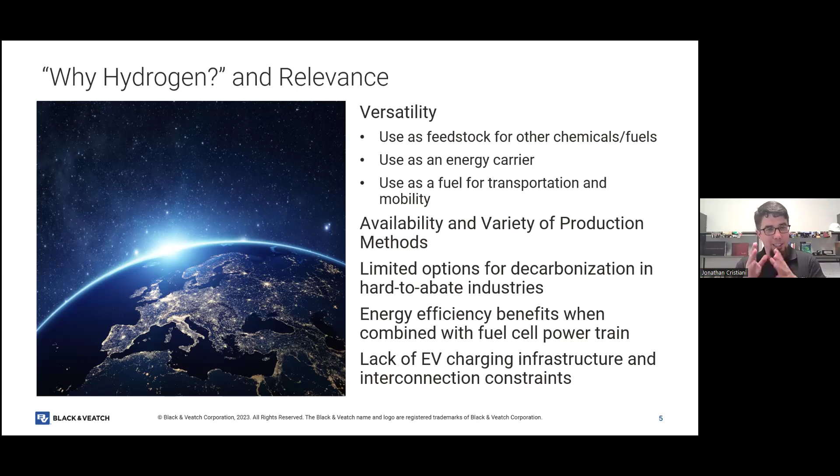So in some cases, we're very limited in terms of what options we have for decarbonization, especially some of those hard to abate sectors like aviation, transportation, some of the steel and cement type industries. So I want the team to start thinking of hydrogen in a similar vein as batteries, in that it's an energy carrier. It can be used for all these different purposes, and it's actually quite complementary.

So you can see on this slide some of the different ways that we think about battery electric vehicles and how fuel cell electric vehicles with clean hydrogen complement that, especially when we start thinking about medium and heavy duty vehicles. Buses is something that Des mentioned. We're using hydrogen in all these applications today, and we're in late stage prototyping, pilot fleet type stuff for medium and heavy duty applications. So there's really a lot of excitement around fuel cell vehicles, but chicken and egg. We need to have infrastructure to support those endeavors.

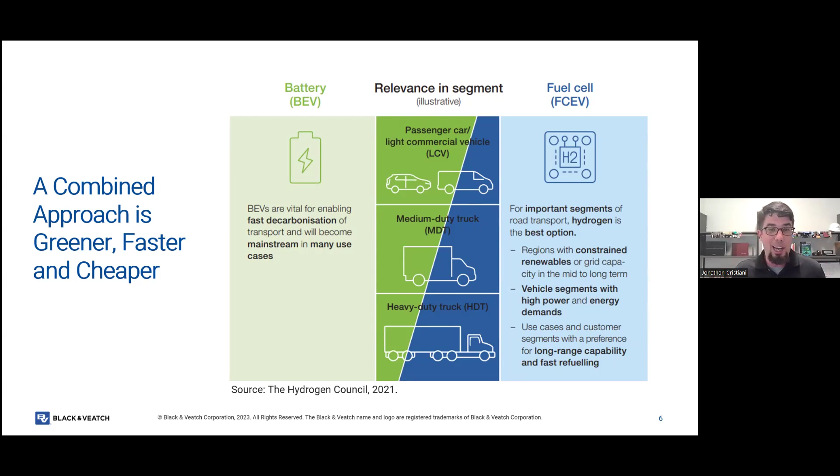As we think about transitioning our mobility sector to be zero emission, one pathway is not enough. You can't put all your eggs in one basket. It's nice to have diversified options here. And that could mean taking the carbon out of gasoline and diesel. That could mean other gaseous fuels, like Ben mentioned, CNG and propane and the like. And that certainly means also hydrogen and batteries as well.

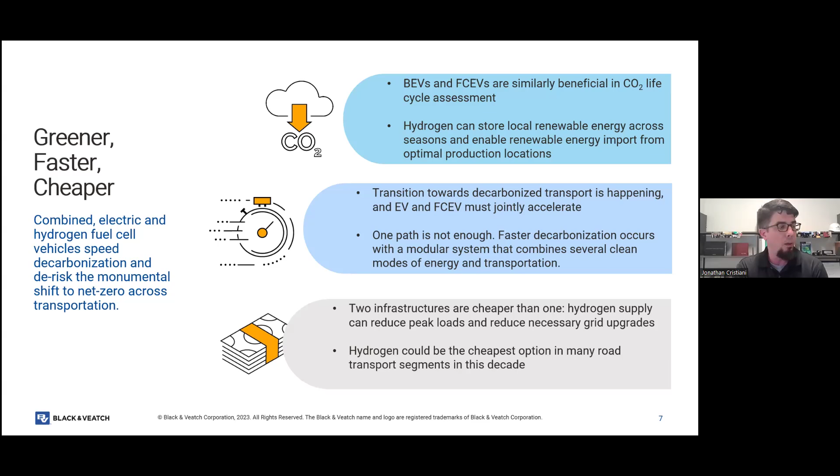The two infrastructures are different. Ostensibly, you're charging with one and you're refueling with another, but they can be complementary, especially in the sense that with some of these high power DC fast chargers, you may not have the bandwidth to interconnect to get things done quickly. And so hydrogen can actually be a nice complement to that. And it could also be the cheapest option in certain cases, in certain geographies with certain duty cycles. And some of that is being proven out now, especially for those heavy duty applications that I mentioned.

So stepping back, Hydrogen 101, it's all what you learned in chemistry class, however many years ago. Hydrogen is very abundant; it's the most abundant element in the universe. It exists as a diatomic gas, so two atoms together. And it's colorless, odorless, pretty simple and easy. It's very light, so that makes it quite buoyant. But because it's light, it can get blown around by the wind.

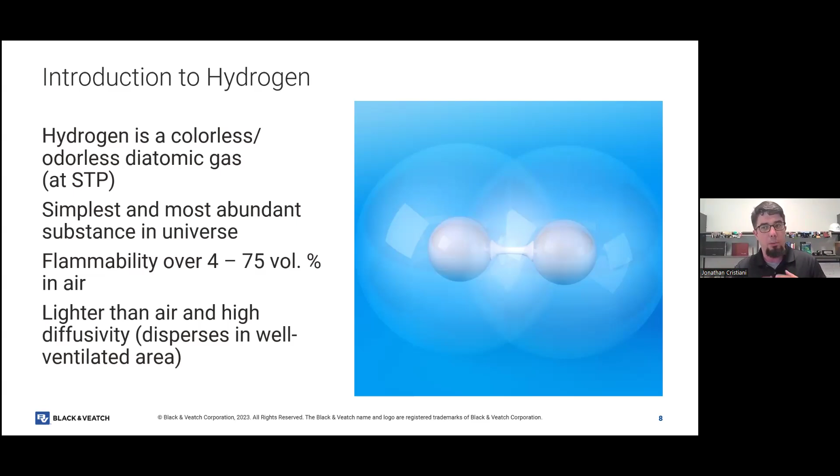So if we're venting hydrogen, for example, and there's a lot of wind outside, you're going to see that hydrogen kind of blowing all over the place. It's got a really wide flammability range, the widest of any substance in the universe. So that's where we start to get into safety related issues. And it's also very diffuse, so once it's released to the atmosphere, it's going to form a non-flammable mixture quicker than most other gases.

When we think about hydrogen as an energy resource, as an energy carrier, you often want to compare it to other fuels we're more familiar with. So a kilogram of hydrogen is roughly equivalent to a gallon of gasoline on an energy basis. And it also contains the same amount of energy as 117 cubic feet of natural gas, but at standard temperature and pressure, that kilogram of hydrogen occupies 421 cubic feet.

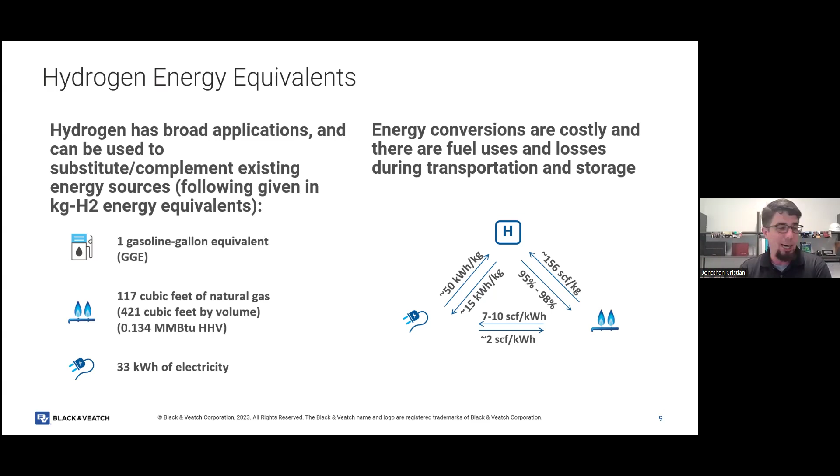So on a gravimetric energy density basis, it's very dense. On a volumetric basis, quite the opposite. So it's less energy dense than natural gas, what we're used to. And I've included some quick back of the envelope conversions for you in case you're interested.

We can distribute it in our gas distribution network. We can use it for power generation, and there's strong interest in that in Florida, as well as elsewhere. And then mobility, everything from forklift trucks used in Amazon distribution warehouses, which is a pretty big use for hydrogen today, through buses and vehicles, LDVs and MDVs, up to trucks and aviation. So we'll touch on all this stuff today.

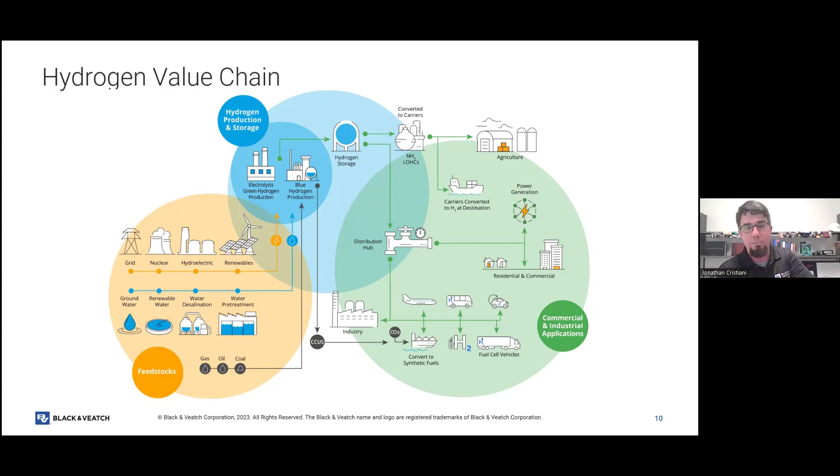As you get to know me, what you'll find is I'm not a fan of the colors of hydrogen, although they're effective as a media tool to simplify the different pathways. And the reason is because I would rather have a discussion around carbon intensity. Carbon intensity is why we're in the clean fuels business, right, team? So at the end of the day, the colors of hydrogen may represent one thing or another, but what we're talking about is carbon intensity.

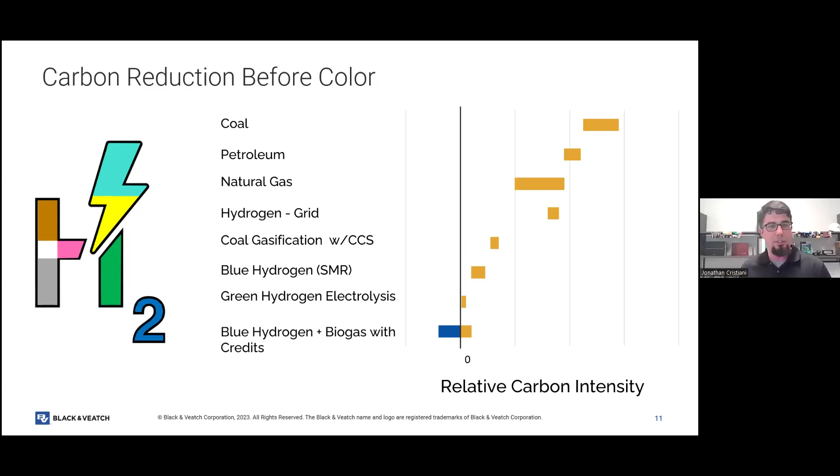And so there's not a color for every last pathway. You can see here some of the different pathways that we think about. These are all just relative figures; there's no hard numbers behind it. The most important thing is there's no industry-wide agreement on what the colors actually mean. We do our best to keep up with how they're being used, but sometimes they have different definitions depending on where you are in the world.

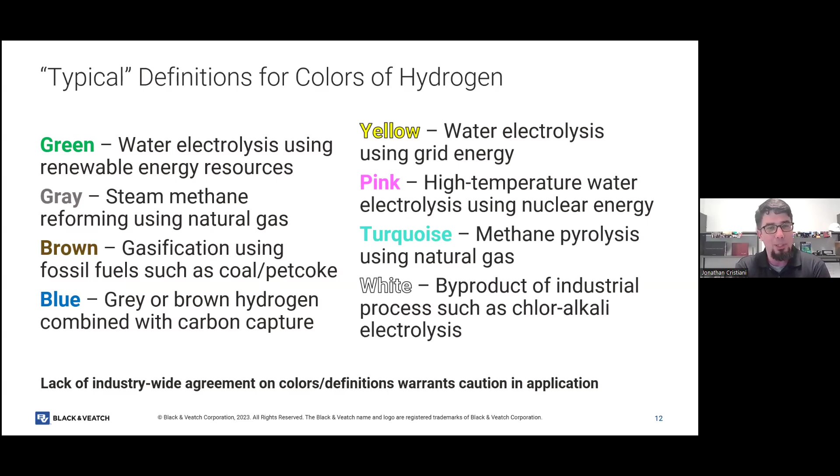Most of the low carbon hydrogen infrastructure that we're talking about nowadays is related to green hydrogen, using renewable energy and electrolysis, like I alluded to before. And blue hydrogen is of significant interest. That way we can continue to use the fossil-based resources that we have and, in combination with carbon capture, reduce the carbon intensity. So lots of different options, lots of different conventions. I won't bore you by going through all of these, but these are about as many as I've been able to gather on a self-consistent basis over the years.

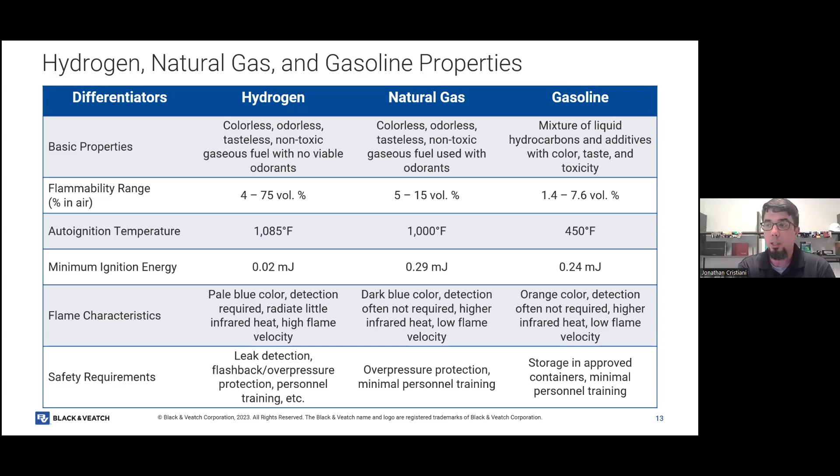Other risks and hazards associated with hydrogen. The big one is leakage, right? Because it's such a tiny little molecule, it just wants to escape and go all over the place by itself. So we need to have a means of leak detection, gas detection, a means of understanding if there's a hydrogen fire. Hydrogen burns nearly invisible to the naked eye. So you need specialized flame detectors, unless you just see something melting in front of you, and that's usually a good sign you have a hydrogen fire as well.

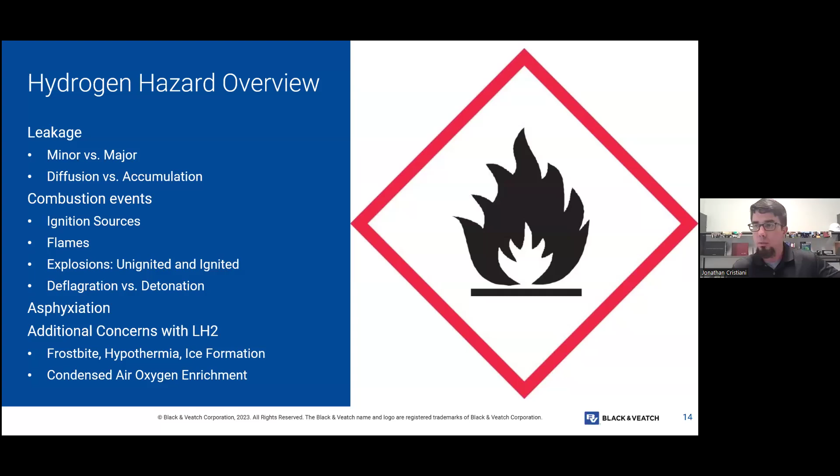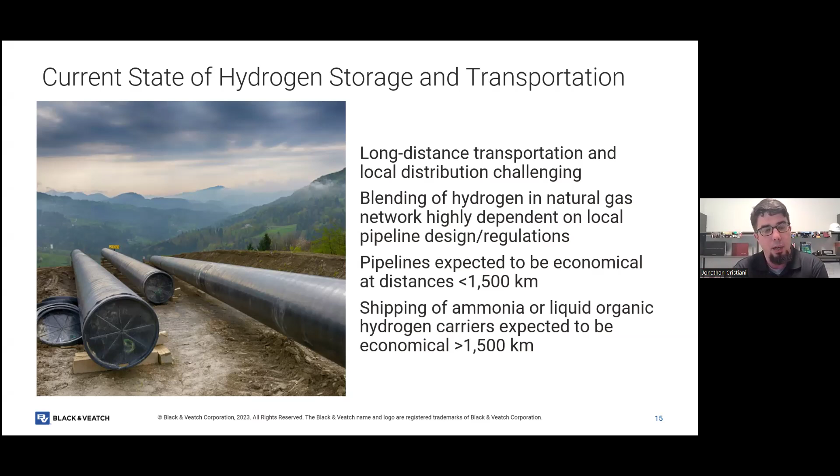So for domestic applications, less than 1,000 miles, 1,500 kilometers, that's where pipelines are really expected to be most economical. When we start thinking about the global trade of hydrogen and its derivatives, it's really more of a focus on chemical energy storage. So ammonia is a big topic that we'll talk about a little more here in a minute. Liquid organic hydrogen carriers basically can store and discharge hydrogen. You've got methanol in the mix, so there's a lot of different options for producing hydrogen domestically and shipping it to markets overseas, and Florida is likely to be a major player in that industry.

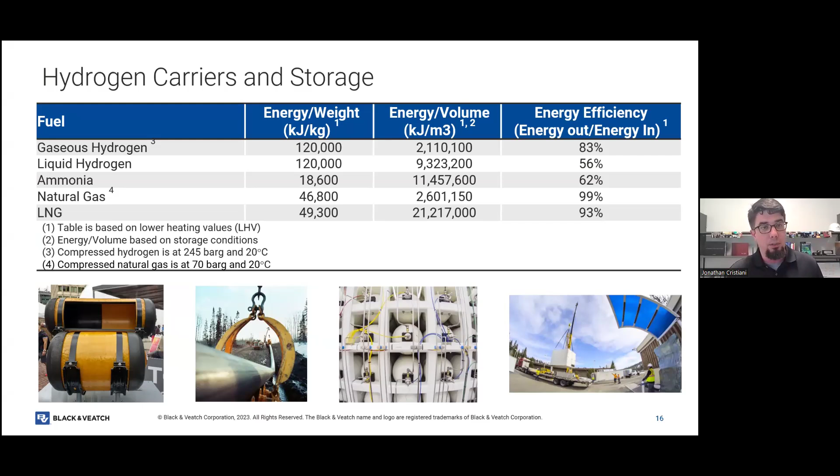Liquid hydrogen is more going to be distributed in a region predominantly for mobility applications. So we don't count mobility as energy necessarily, even though it technically is. And it's a great way to get by distributing a larger quantity without the pipeline infrastructure yet. And you can see ammonia has some favorable characteristics as well. And that's really why it's being considered as kind of the zero carbon derivative of choice for global trade, like I talked about before.

All right, pop quiz number 2. So which of the properties of hydrogen represent the most significant safety hazards? My slide from a couple slides ago. Who wants to take a guess? Please type it up in the chat. I'll give you guys a few seconds. Anybody? No takers? Lack of color, small molecule, flammability. Yeah, Virginia, you've got it.

The wide flammability range is definitely one of the biggest safety hazards, and that low minimum ignition energy too. We really need to be cognizant of the electrical equipment that we're designing. And so electrolysis, it's very energy intensive. We're pumping lots of electricity into these things. So there's a careful balancing act that we need to do as we're pumping in that electricity and trying to get the hydrogen out so that it remains safe. But nice job, team. Glad y'all were participating there in the pop quizzes.

Just a few closing slides. I wanted to at least demonstrate here why ammonia is so important to the industry right now. Not only is it more appropriate and more energy efficient for kind of global applications, but we're now starting to see some convergence. Most ammonia today is used in the fertilizer and chemical industry. But as we start to think about ammonia as a hydrogen carrier, we now can start thinking about ammonia as an energy carrier in and of itself. So utilizing ammonia directly, maybe combusting it in a power plant, maybe cracking it back to hydrogen so that can be distributed through domestic pipeline systems or what have you.

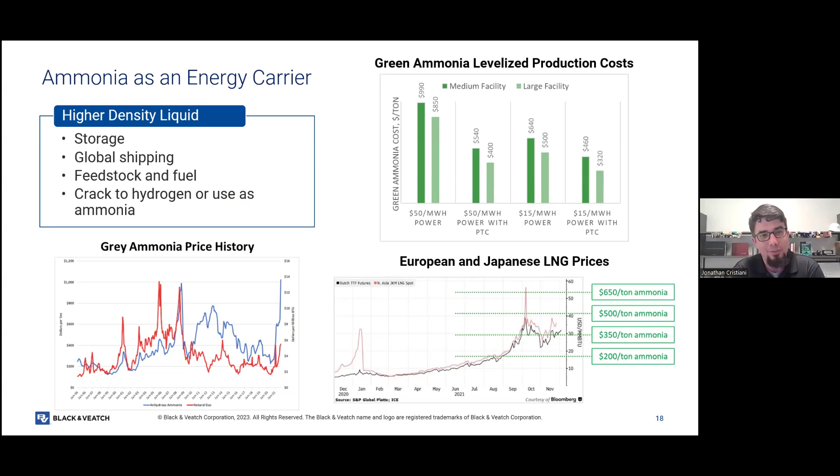Another big one that's of interest, particularly for the aviation industry, is sustainable aviation fuels. I know there's also interest in using hydrogen directly for electric plane type applications, but that's probably not going to be as major of a factor, at least in the near term. Lots of R&D left to get through that. But if we can use clean hydrogen to produce sustainable aviation fuels, it's the same infrastructure that it is today. We're just taking the carbon out.

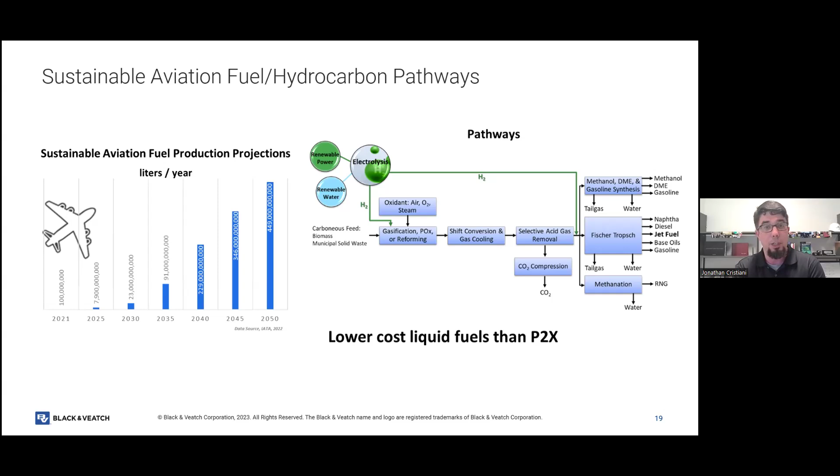So over the next several decades, there are some pretty big targets that you can kind of see on the left-hand side for producing sustainable aviation fuel. Whole bunch of different pathways that we could go using biomass, municipal solid waste, other types of sustainable feedstocks in combination with the hydrogen. And then all the different ways, we can do liquid fuels, we can do gaseous fuels, we can do renewable natural gas through methanation. Lots of different pathways that are possible here as we think about the different means that we want to use our hydrogen.

So some key takeaways: the versatility, don't forget about that. That's why people care. That's why we're investing all this $8 billion in federal money into hydrogen hubs and the infrastructure associated with it. It can be used as a gas, as a liquid. It can be used as a derivative. And there's strong interest in developing pipeline networks, both for storage as well as transportation from A to B.

Liquid hydrogen is probably a little more favorable for the mobility sector itself, just because we've got a long way to go to build out our pipeline networks. And when you think about different project opportunities, you want to be thinking in terms of, okay, what's the carbon intensity? What's my production method?

What's my end use? And we're working on projects throughout the world. I can't say who, but we just finished up commissioning a project there in Florida with a major utility client. So these things are happening. It's happening in real time.

There's a lot of challenges associated with managing those safety aspects, those hazards that I talked about, but we're working through it, and we're participating on codes and standards boards. We're participating with industry trade associations. We're breaking through all of that. And the hope is that we can get to a place where the economics work out for some of these applications.

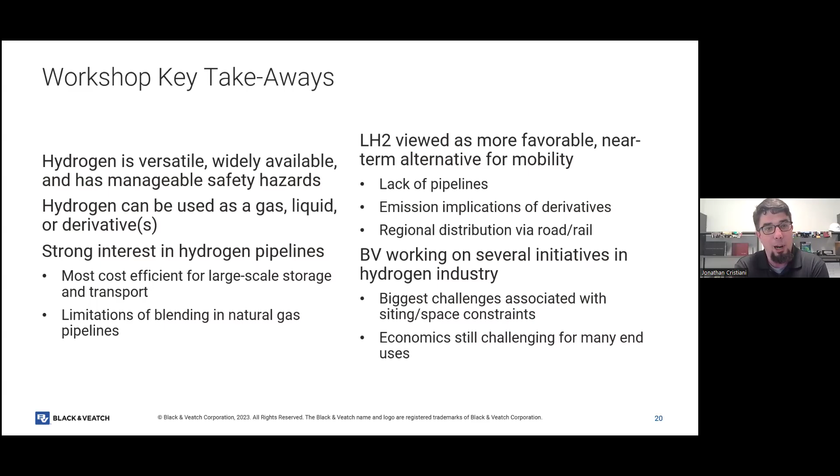So really a great time. I've been working in hydrogen for 20 years. So there's never been a more exciting time, at least in my career, than now.